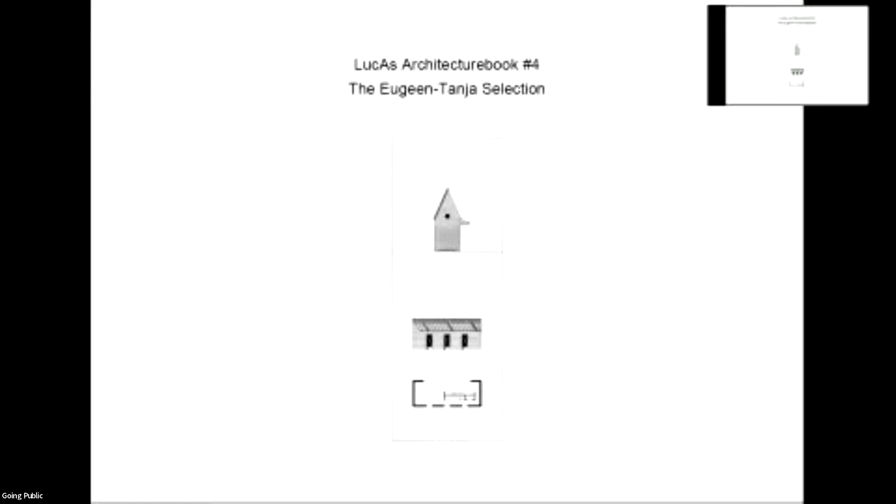So one prize for a project made by a student at school, and one project made in a studio by an architect. Every year, students submit projects by semester, and every year the number is growing. These entries are viewed by Eugeen and a committee of teachers. After long deliberation and with the necessary enthusiasm, the selection is made.

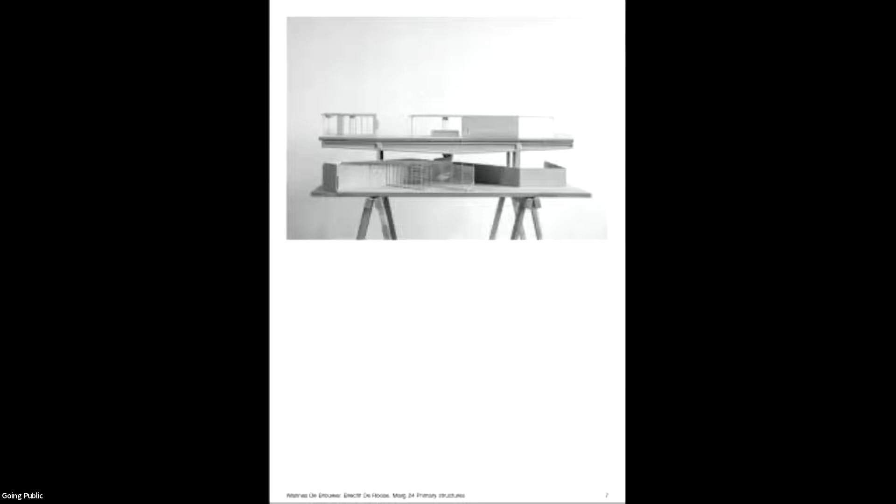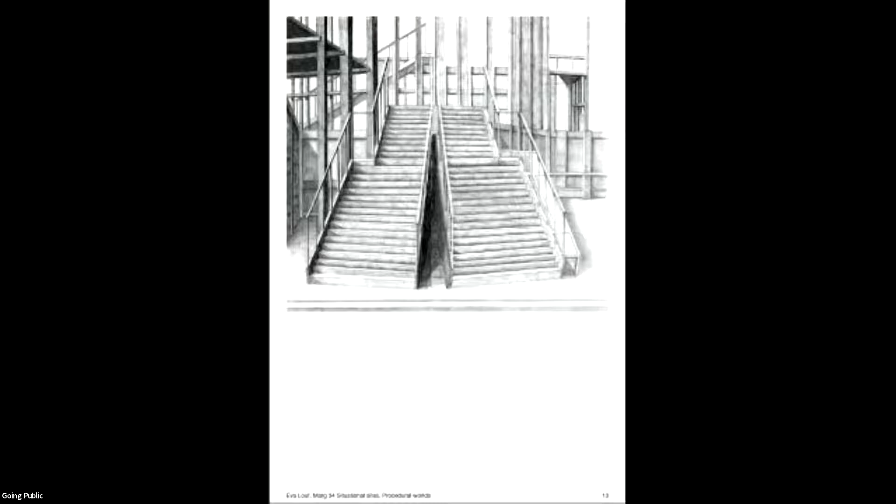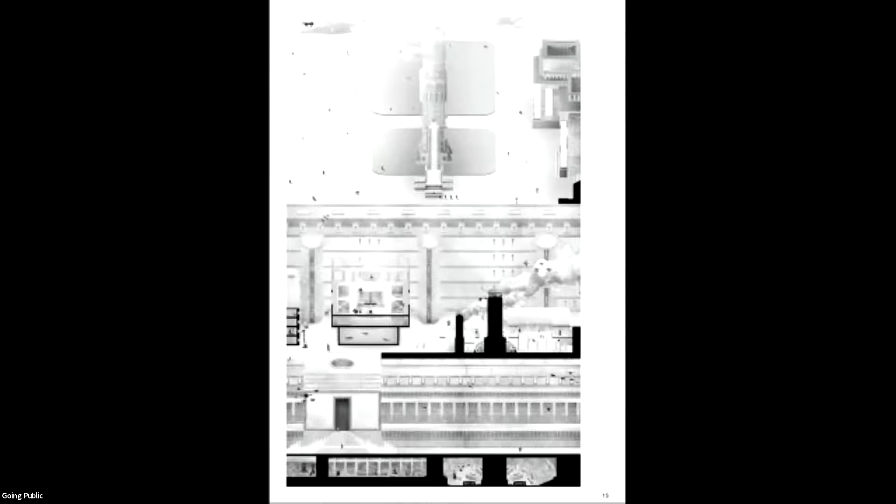Eugeen was a teacher who invited students to debate and to question, with words but also with drawings. After all, Tanja, from the title of the book, is a drawing by an architect who allows architecture to be much more than just architecture. Tanja is a drawing by Eugeen. The drawing does not show everything, it shows just enough to suspect everything. She was drawn to dream. That is also what we looked for in these submissions, the potential to dream and to imagine.

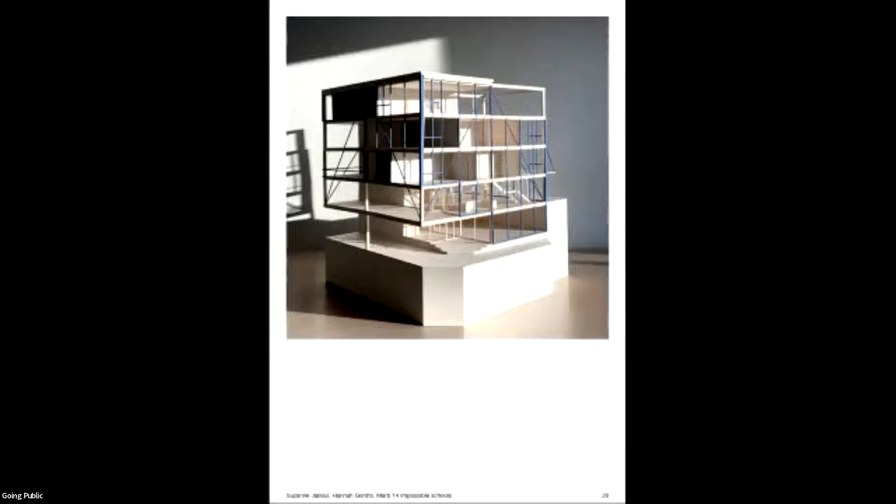Drawings and models are essential for the development and communication of architecture. They make us think, desire, dream. Students show their skills with it. Teachers can intervene, a dialogue takes place. We hope with this book to establish an overall dialogue, a dialogue that encourages debate.

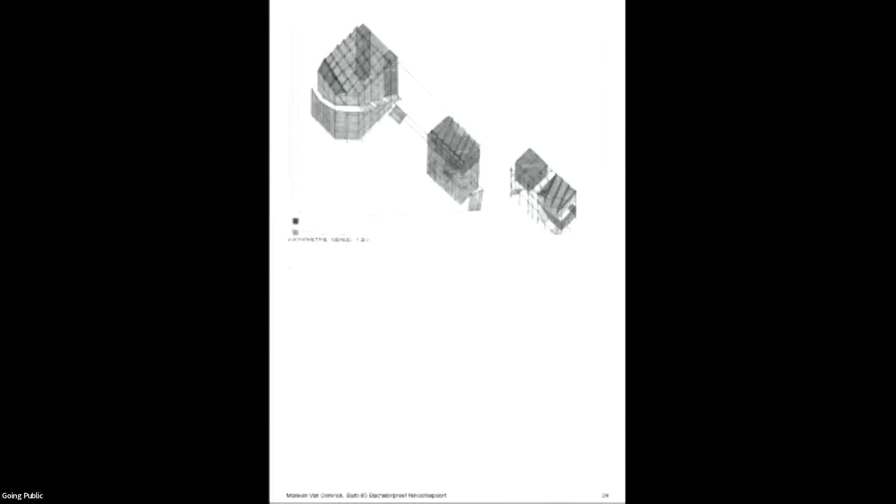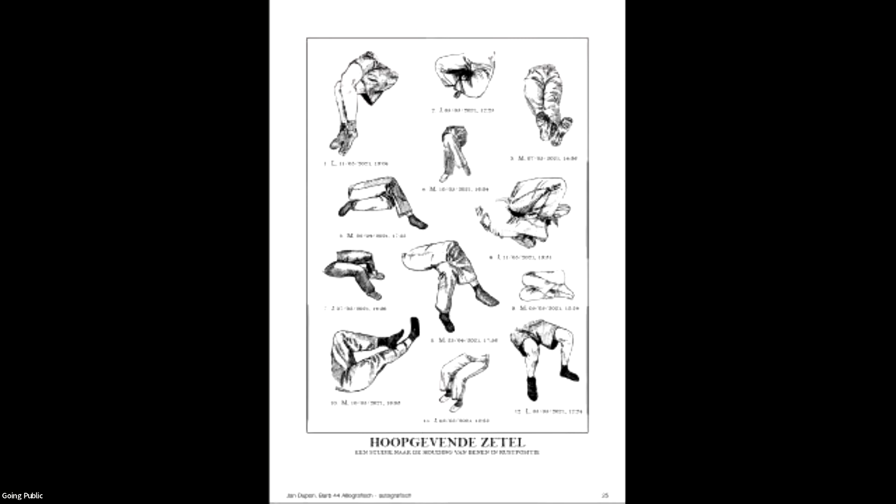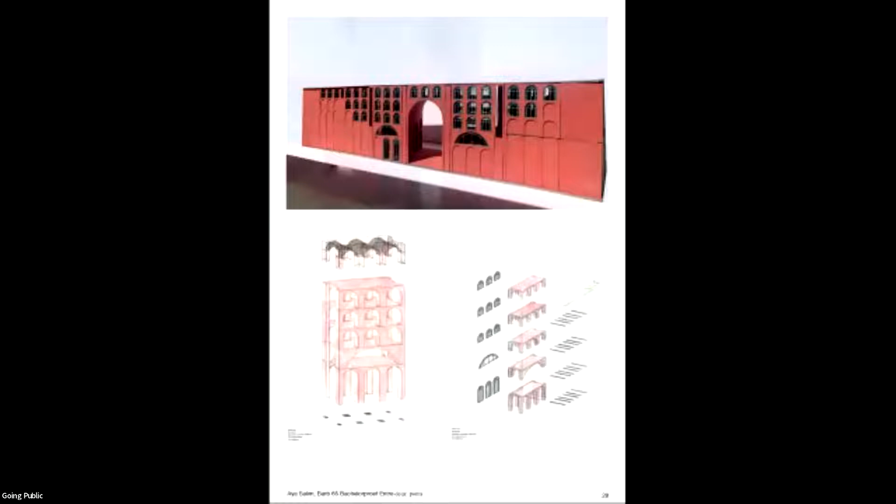Students have been submitting their projects for 4 years now. This year, the drawing, especially the process drawing, received extra attention. In this edition, you will find remarkably more drawings: process drawings, concept drawings, drawings about materialization, drawings about construction, and so on. It's surprising how diverse the entries are and how diverse the personalities.

Students visualize the world of their project in their own way. This is what makes the selection so special and what makes it unique to our school. Lucas Architecture wants to celebrate the architectural projects, and more precisely the projects of the students. The book consists of a selection of 40 student works, extracted from last year's studios at KU Leuven, Faculty of Architecture, Ghent and Brussels. But the book is also about the teaching staff.

Following the selection of the submitted student work for this year's edition, we asked the teaching staff of those students to do two things. Of course, a summer came after a long pandemic year, and some were already elsewhere and could not react. Still, a nice amount of answers came in.

First, we asked the teachers to send in some pictures of their own work in order to reveal proximities between students and teachers, and coherences across studios and architecture practices. In a word, to reveal what makes a school.

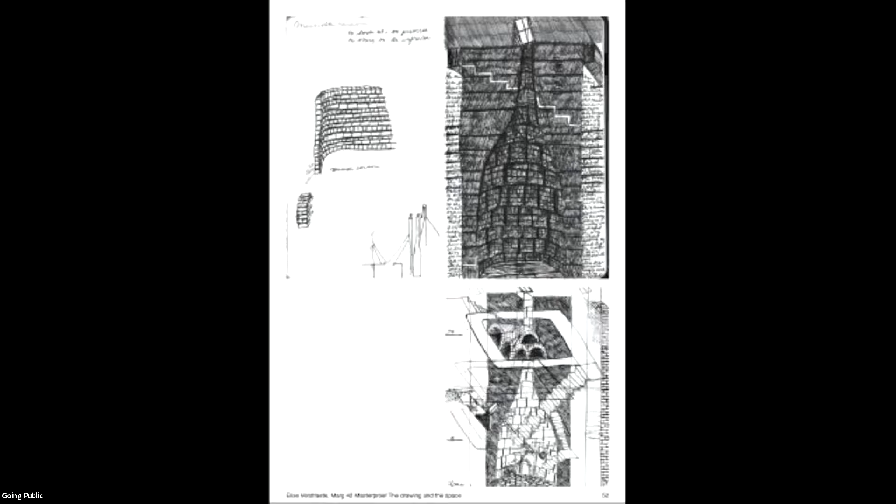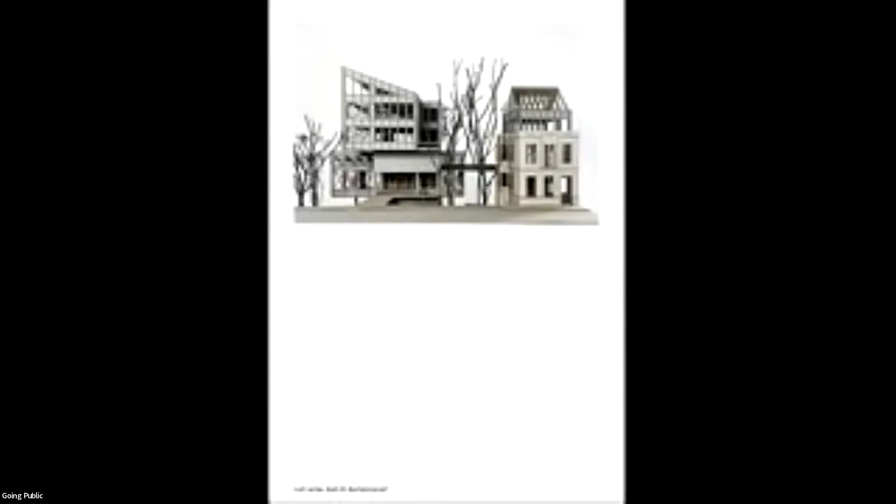Maybe here again, there is a striking diversity of inclinations, and still you can clearly feel the school behind it. Based on the submitted work, we ask one lecturer to present on the book presentation. So this evening, we introduce you to, as they are part of Wissel Architecture Studio, Lennart Vandewaetere and Marius Vaneeckhoutte.

Teaching in first and second year, their work has not escaped our notice. Wissel consists of 3 members, the third is Felix Hietekatte. Their project, the Tower of Seoul, is currently on display on the ground floor of the campus in Brussels. I would definitely check it out.

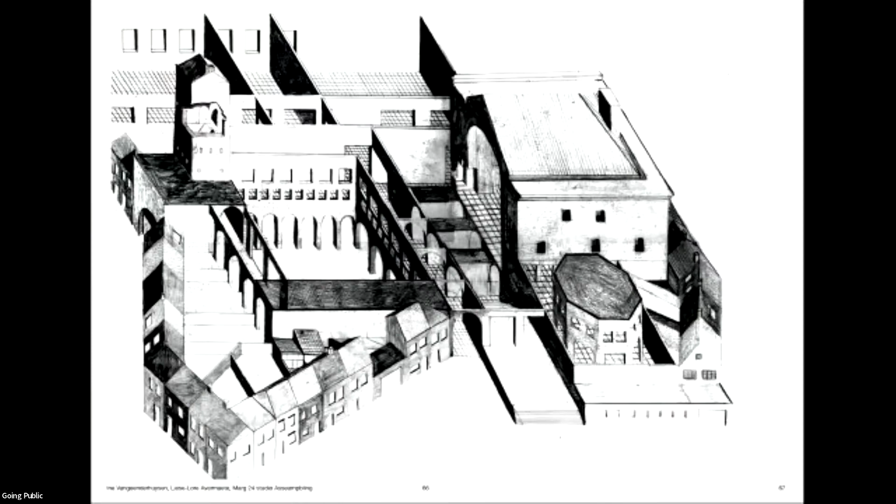Wissel is an architecture studio based in Brussels. Wissel tries, dares, acts and interacts. Wissel shifts between drawing, model and image. Wissel researches anatomically. Wissel ignores the obvious in search for the unexpected. Wissel is a change of course in a thinking process. Wissel is a cross-fertilization between thinking and acting. Wissel is searching for function transcending spatiality. Wissel is an act of changing to or adapting one thing to another. Wissel changes the position, direction, or focus at any time. Wissel is a verb. I give the word to Lennart and Marius.

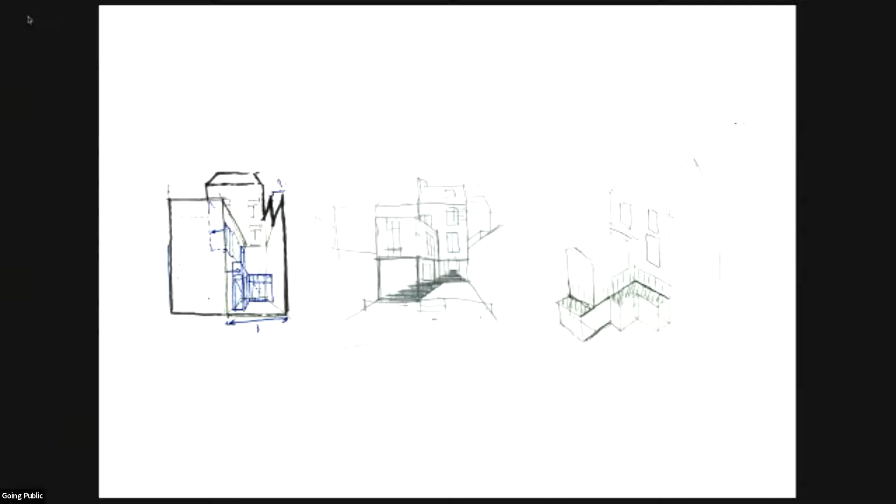These are organization options we tried out in the beginning of the pre-design. This basically tells us that it always comes down to a good position of the toilet. As weird as it sounds, it's really a very important part of the plan, where to put the toilet. It's actually kind of the last piece we needed to fit the puzzle of the ground floor.

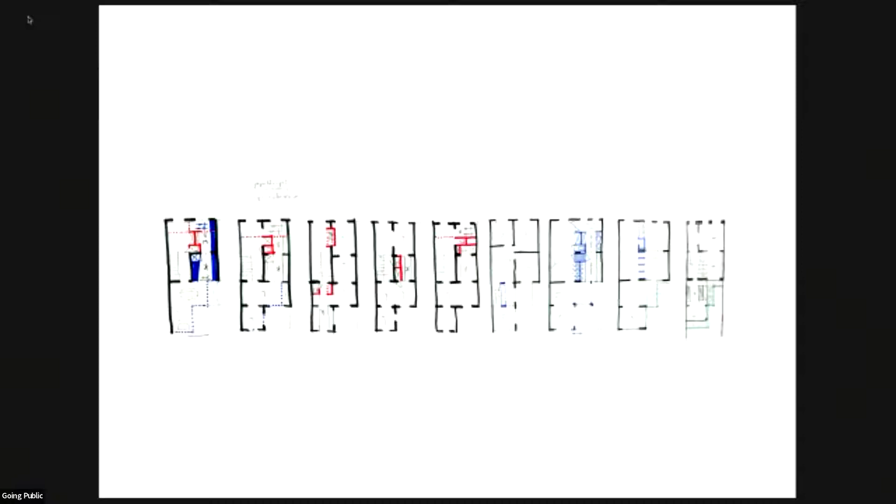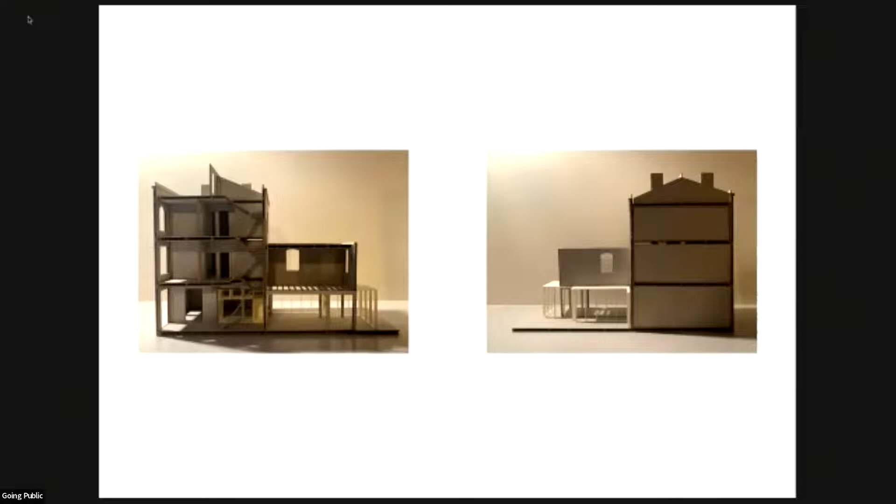This is one of the first sketches we made, because another really important thing about the house is that the garden is oriented to the north. So we have a lot of possibilities to drag light into the house, and we don't have to be scared of overheating or too much glass. This is the first hint of what we were going to do with the facade afterwards.

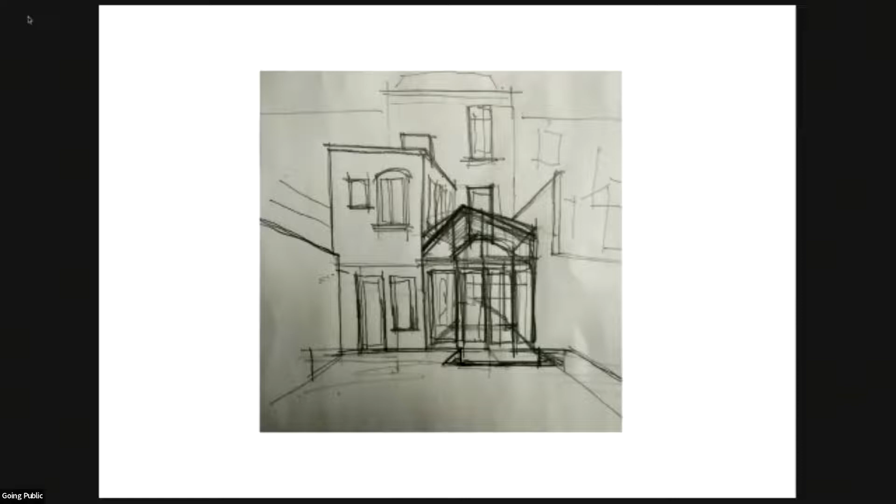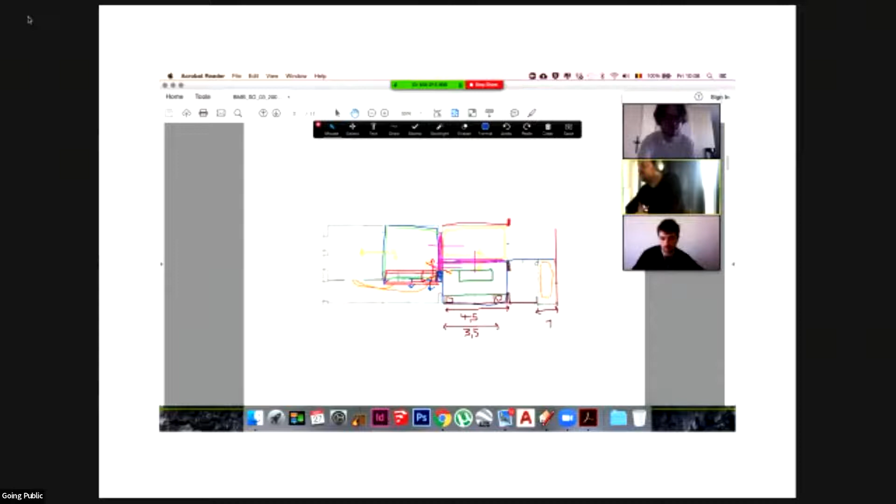This is a print screen of a Zoom conversation we had in March, around the beginning of the lockdown, where we tried to get a grip on the pre-design, all three of us in our own houses. Soon after this conversation, we got to the first big part of the pre-design.

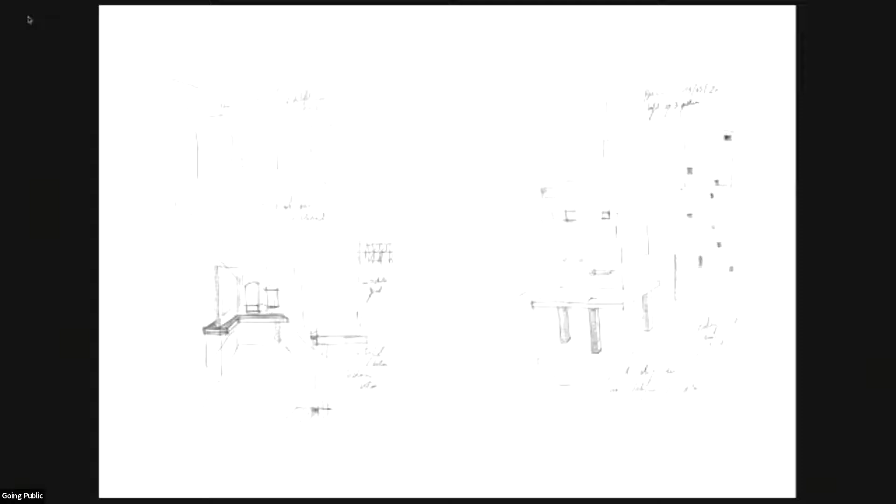One of the main questions of the project was how we could preserve the existing ensemble on top of the ground floor, which we wanted to give some new functions. This is probably one of the most important sketches from the pre-design, because it became our main concept. Instead of just holding up the upper part with a normal concrete beam, we thought to stretch out those classic standard lintels and make a kind of table from it. The idea grew into making a concrete table that functioned as a stretched lintel.

The nice thing about this idea was that it held up the existing situation, but also created a kind of free plan underneath. So we were really free to place all the structural points where we wanted, and to create a free canvas for the facade structure.

This is the first implementation of this concrete table in our plan. On the left side you see all those red marker points — this is really the first tryout to position the concrete columns. Here you can also immediately see the quality of this idea of the table, because it's enlarging the fourth room, which becomes a garden room, let's say.

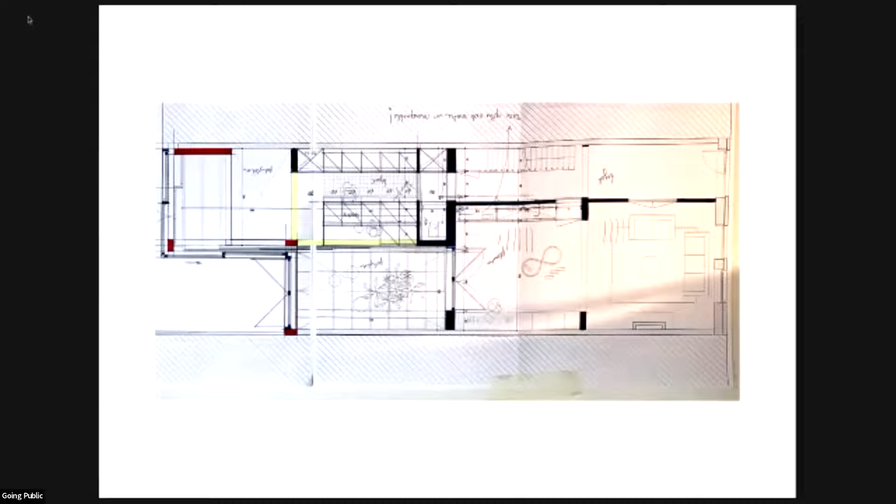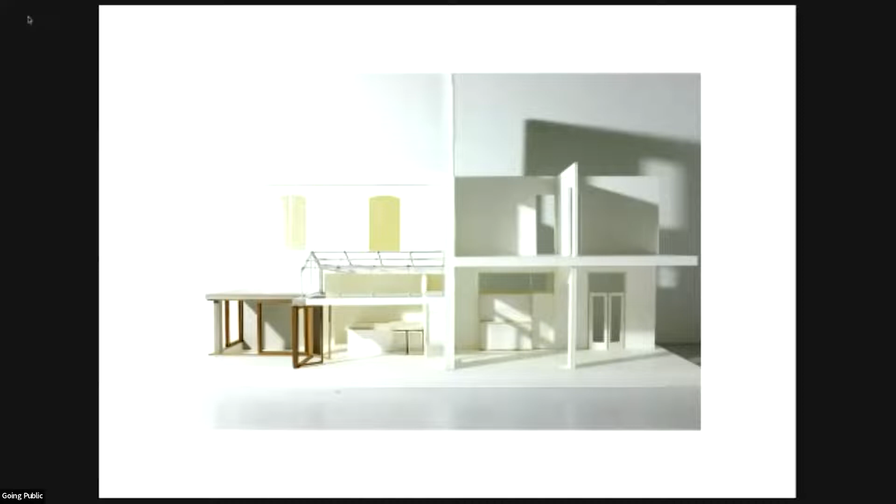This drawing was actually a standstill before we were going to draw all the plans to hand in the documents for the permit we needed from the city of Antwerp to do this reconversion. It's also important because here we decided what rooms we were going to put in sequence. On the right, you can see the existing house, where we kept the situation as much as possible how it was.

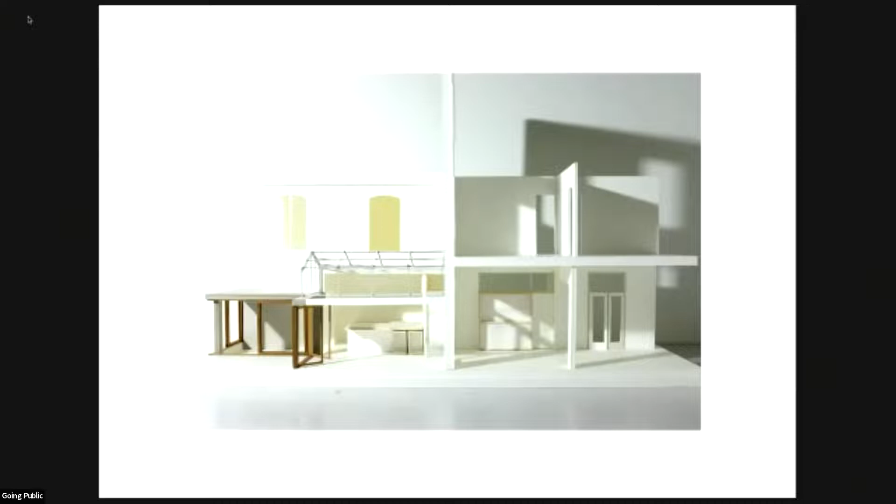The two rooms on the left are the new sequence, where we put the kitchen, but also two different rooms positioned at the back toward the garden, and a room underneath the glass dome you can see on top. The sequence of these four rooms, going from the facade to the garden, is a kind of walkthrough or spatial experience we wanted to try.

The first thing we noticed was— something's happening to the presentation. Just a second. Okay, never mind.

One of the first things we noticed while testing the idea of the concrete table in a model was that the level of the concrete table allowed us to put a big glass dome on top of it, to get all the light into the existing parts of the house. Because it's oriented to the north, we were free to do that, and this is the first model we made where we could experience the light coming through to the facade in front.

These are drawings we made to discover how to position the columns of the concrete table. This is also research for the back facade and the level of the concrete slab, the dome on top. It's something we do at Wissel a lot — we make models and then we sketch again, make new models, sketch again. I make a sketch, give it to Leonard, he gives it to Felix, and that way we go on.

This is a new version of the concrete table. This is a classic Wissel moment where we go too far and design too complex a structure — we wanted sliding windows, but it was a bit too much at this point. Because it was lockdown, we had a lot of time for this design, so we made a lot of options in this space. This is a typical moment where we try to implement too much into the design.

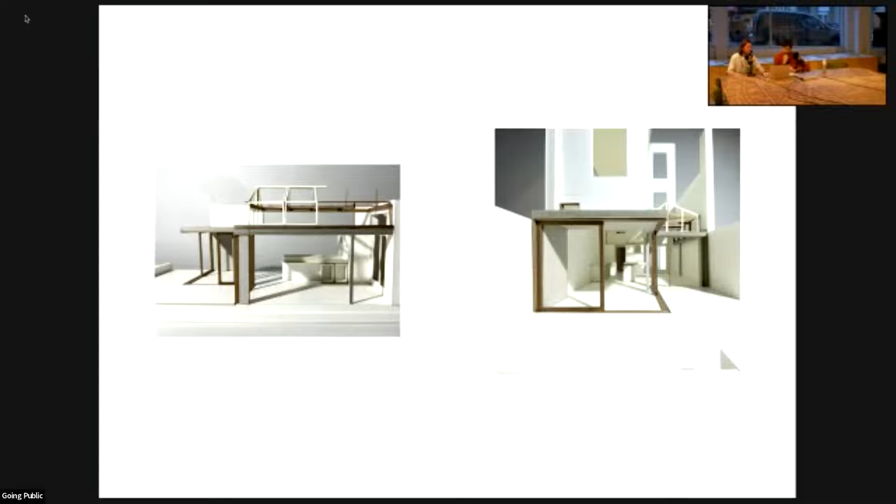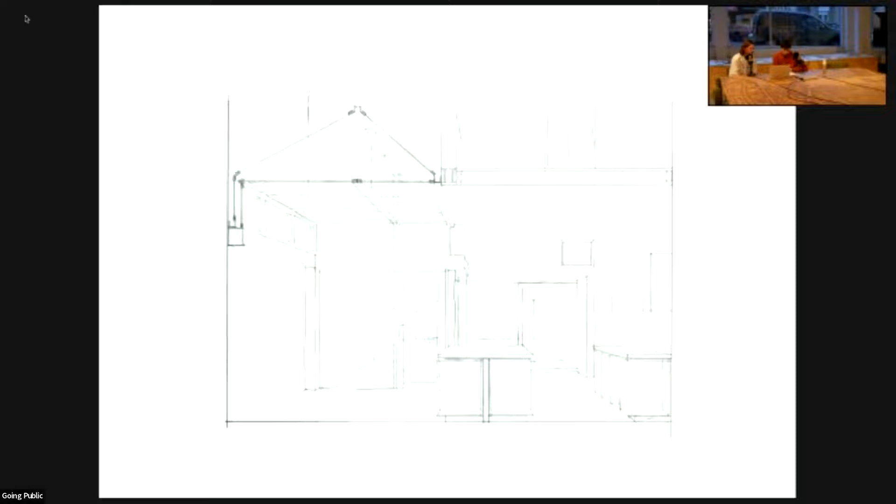This is a drawing — basically a technical section, but also a perspective of how we wanted to experience the garden from inside the new rooms. So this is basically the end of the pre-design, where we discovered a lot of joints and construction moments which we hadn't worked out yet.

So then we started with the tendering phase. As Marius said, the ideas were quite wild. The design was full of nice ideas, but all those ideas need to be constructed as well. So we started the tendering phase with the new existing situation, the new facade structure, let's say.

Something we always do with Wissel is using a lot of references. So the reference is an important thing in our process, but mostly we don't show the reference only as a reference. We always try to show it as a two-sided image, and we always try to give an immediate interpretation of it next to it.

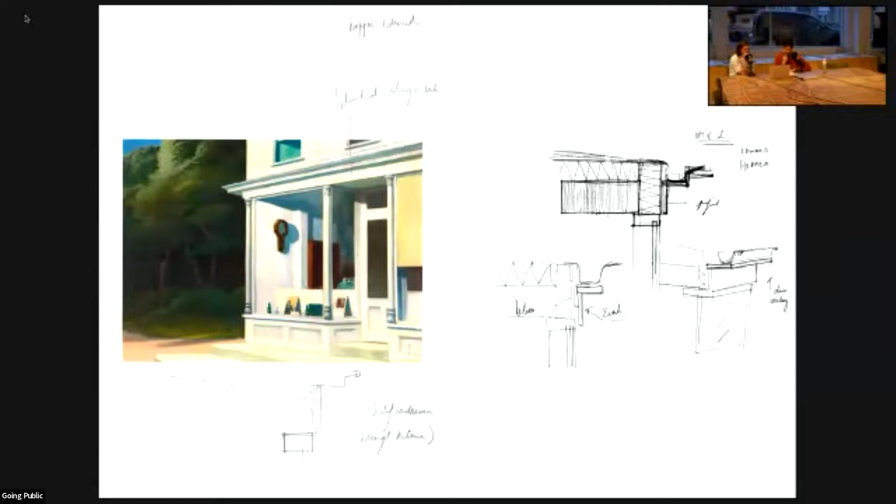This is really an example of it, coming straight out of the process bundle. On the left side you see a painting of Edward Hopper, quite famous for his colors, light, shadow, but also well known because of his architectural details. In this reference, we find an interesting roof edge. On the right side, you see our interpretation on sketch. First, above the sketch, we try to figure out how this roof edge is working exactly, but immediately under it we start to reinterpret this idea of the roof edge, the gutter edge from Hopper, and it becomes quite fast our own interpretation.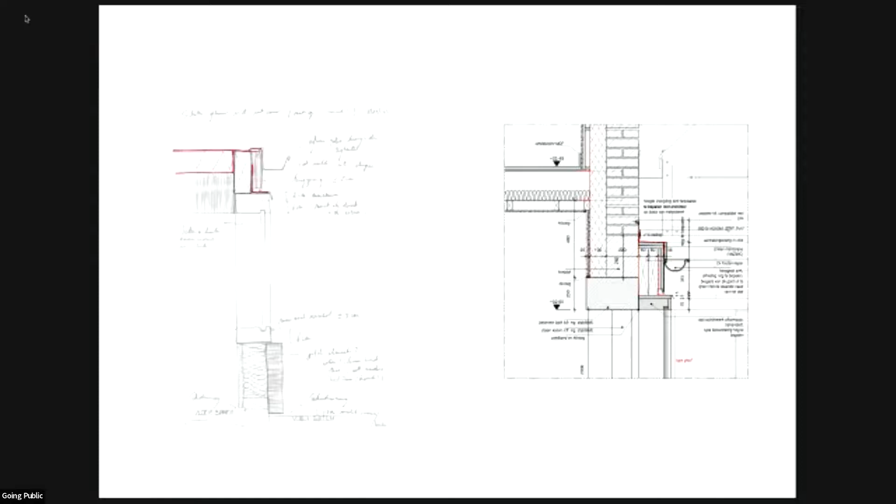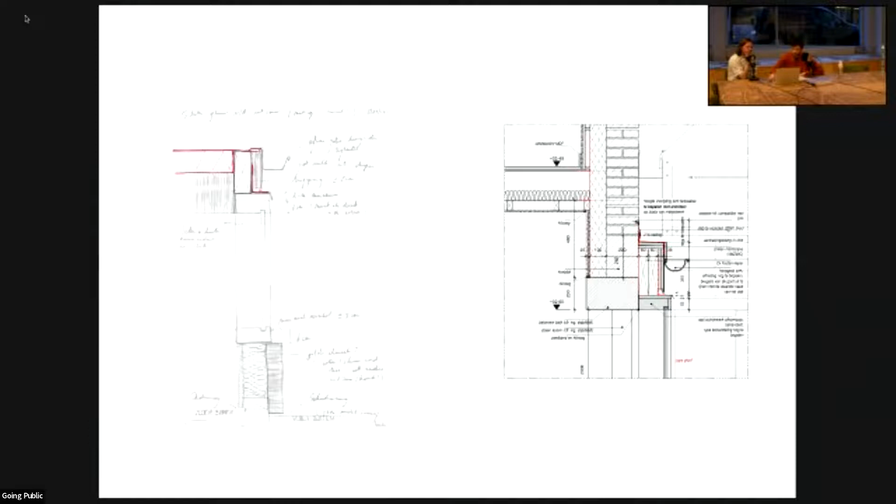Here on the left side you see one of our final sketches of the roof edge, and the idea was to start sketching for making. So actually we have a concrete table, on top of it there is a part of isolation, a very thick package, and to make that package smaller from the outside, we pushed the facade carpentry above and brought it in line with the concrete table. So the bottom of the structure, of the windows, and the bottom of the concrete table are in line with each other. Then the gutter, we placed it in the center of the zinc slab on top of that, which makes the roof edge much more elegant, and those gutters start to become a very dominant thing in our design.

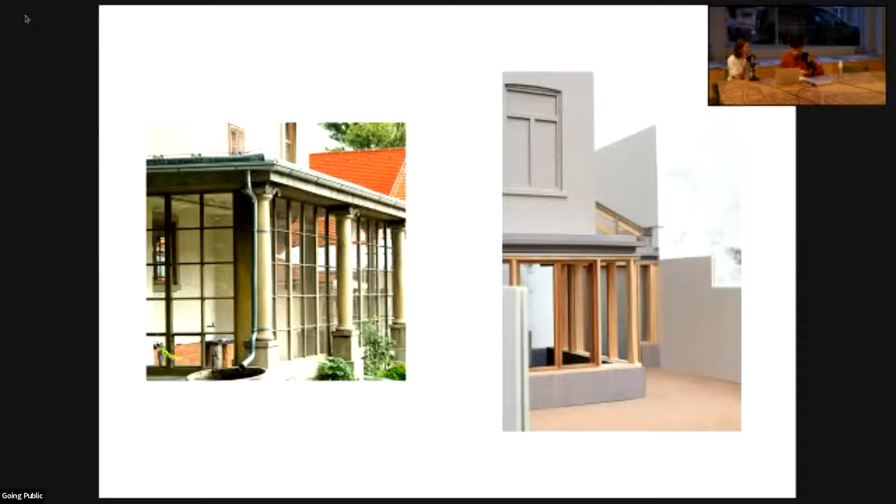On the left side, again, a reference. It's a very classic reference from Josef Plečnik. What we really like about this image is the whole gutter concept, which is more centered on the roof edge. On the right side you see the first image of our tendering model. Those two images next to each other really explain what we want to do with this roof edge. So these references are not only about atmosphere and materials, but they can also present a kind of detail. We think that the classic interpretation of the reference from Plečnik is really communicating with our existing ensemble on top of it.

The next step was to figure out the facade structure. We did already a lot of research in the pre-design, which Marius was explaining. But in the tendering phase, we need to make that possible, we need to make that constructible.

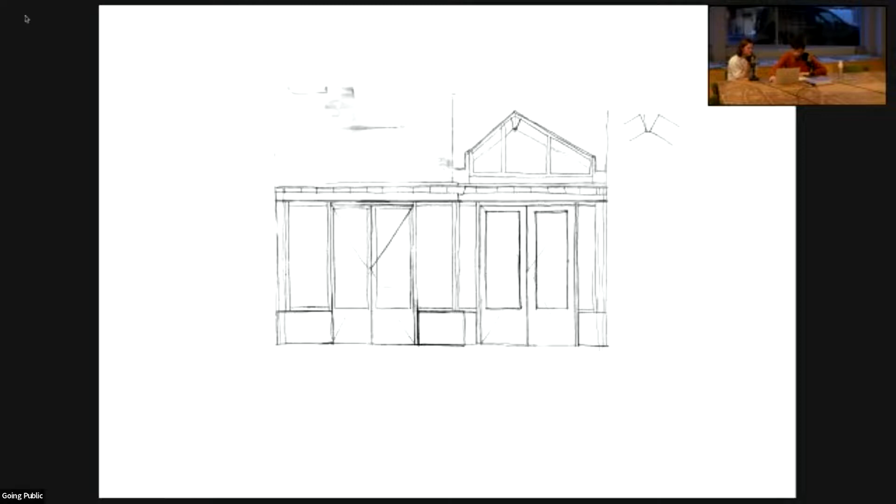We were searching for the right composition of windows, the framing, and also thinking about where do we add doors, where do we add just window frames. In this sketch, you see we were thinking about using two doors: one connecting the third room under the light dome, and the other on the left side making a connection with the fourth room, which we can call the garden room. But after a lot of discussions with the clients, they wanted a more inner space, so we came out with this final technical drawing and chose to use only windows and no doors in the garden room, to make the garden room much more of an inner space.

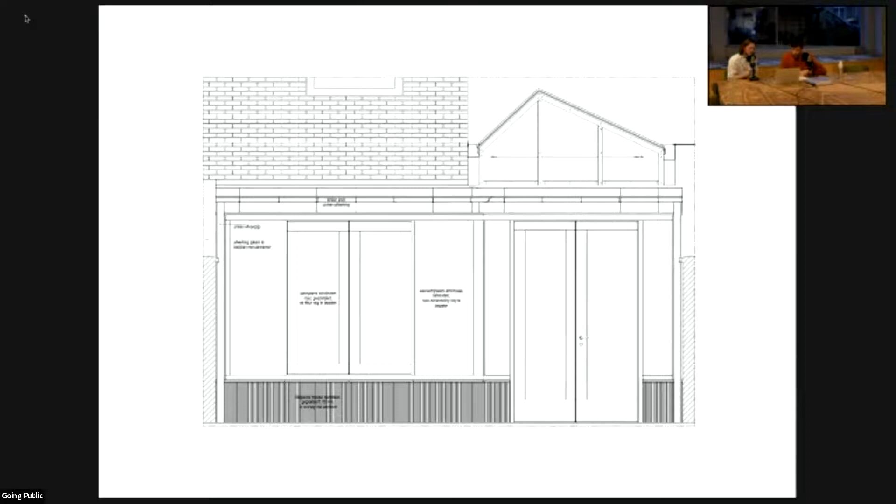In this technical drawing, some things are coming together: the whole gutter concept, the window structure, but also the plinth. We were thinking to work with a bluestone plinth, as you can see in this model, to make the project more mature and again make a relation with the existing house.

For us, the tendering model is a really important tool. It's something we use constantly to test things, to take out all the blind spots, let's say. The model is never lying. It's always a very honest document where you can test things and see how materials are combined together, how the compositions are working, and how the inner space is working.

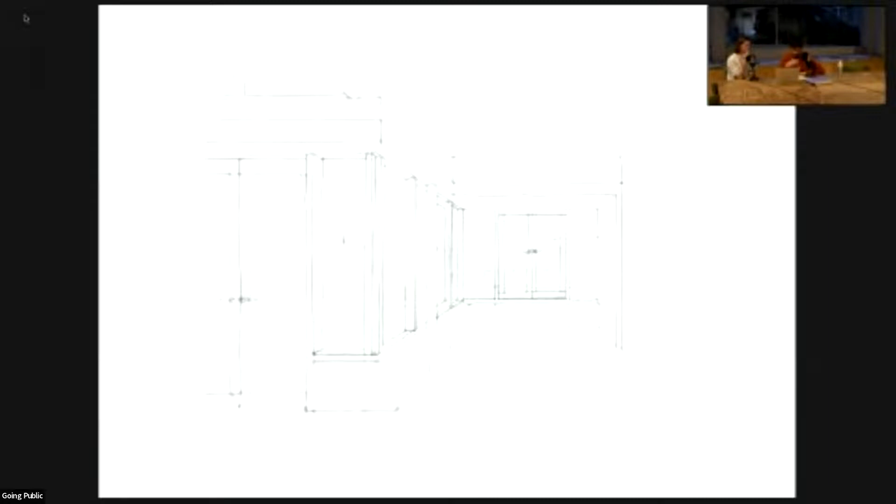This is a sketch from the inner part. We were also searching for the reversion of the bluestone plinth from the outside, and it became a kind of concrete wall, or we started thinking about the concrete wall. This concrete wall was a nice element because it was somehow also part of the concrete table concept from the early phase, and it could also function as a kind of bench.

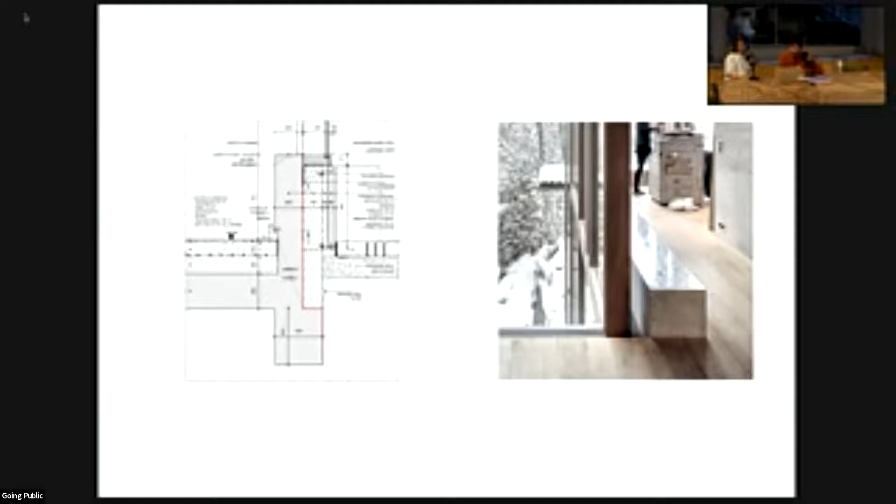We needed to make the detail from it. On the left side you see our detailed drawing, and on the right side a reference from Peter Zumthor, from his atelier in Chur, Switzerland. What we really like about this image is the concrete bench, which is combined with the window facade structure. But these benches aren't only aesthetic or functional, they're also a reverse beam, and that's the same in our project.

So the concrete wall is really part of the foundation, and it starts to be a huge part of the structural impact of the whole table and the whole foundation concept.

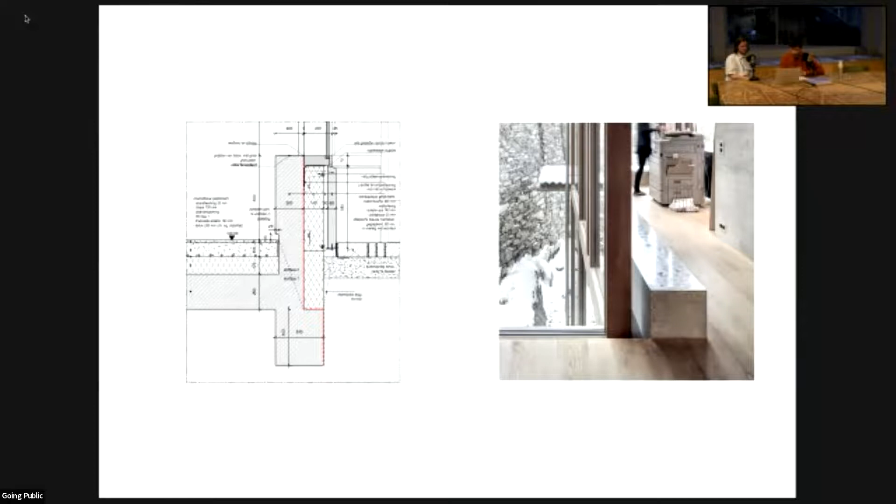Another important thing to discover was the whole idea of the light well. On the left side we see a winter garden reference from Laeken in Mechelen. It's a very ancient project, but we really like the structural concept. It all starts with the window framing, and on top of this window framing you see steel L profiles making the bridge to the trusses of the light dome. Those L profiles were actually a good answer in our project to make some space for the gutters.

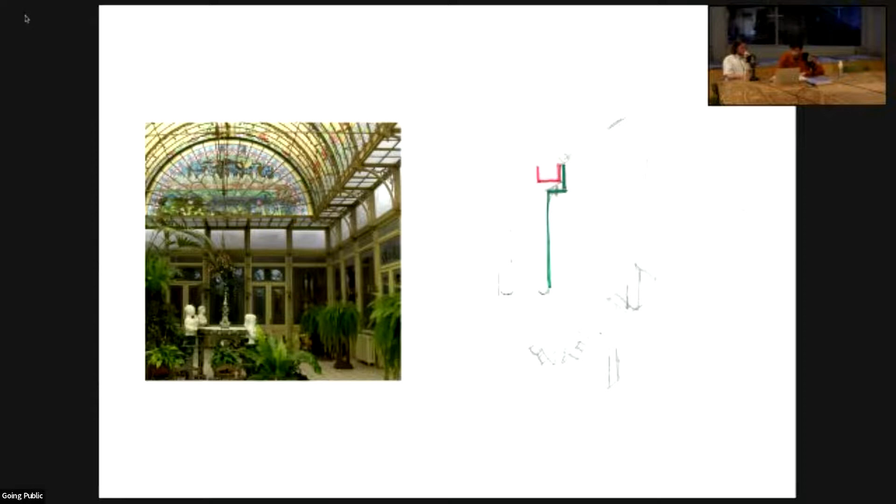On the right side you see some sketches, the first basic sketches we made to come to this important section in our project, explaining how our light dome, our light well, is working.

On the right side you see at the bottom the concrete table where the L profile is put on, and on the left side those L profiles are hanging on the existing building, making place for the gutters, and on top of it are the trusses creating this light.

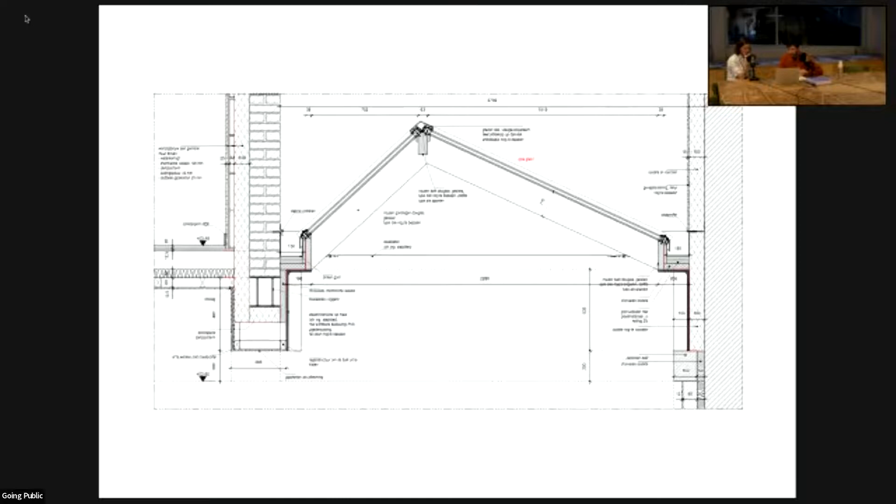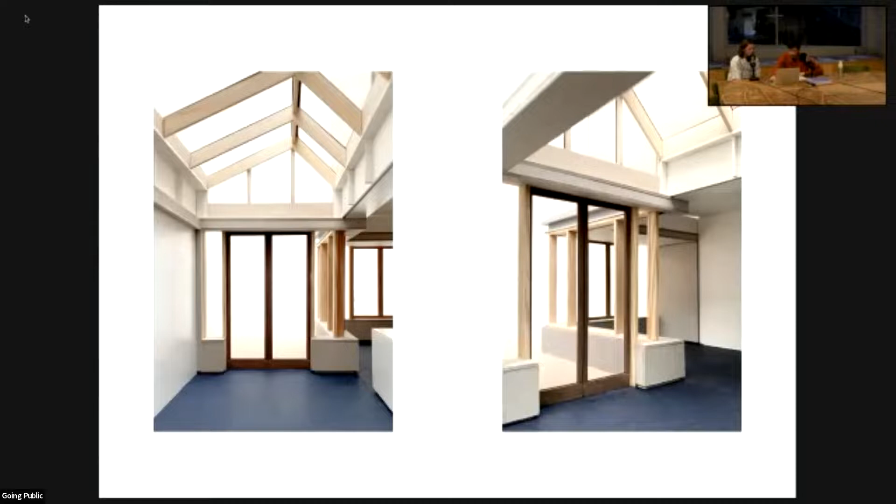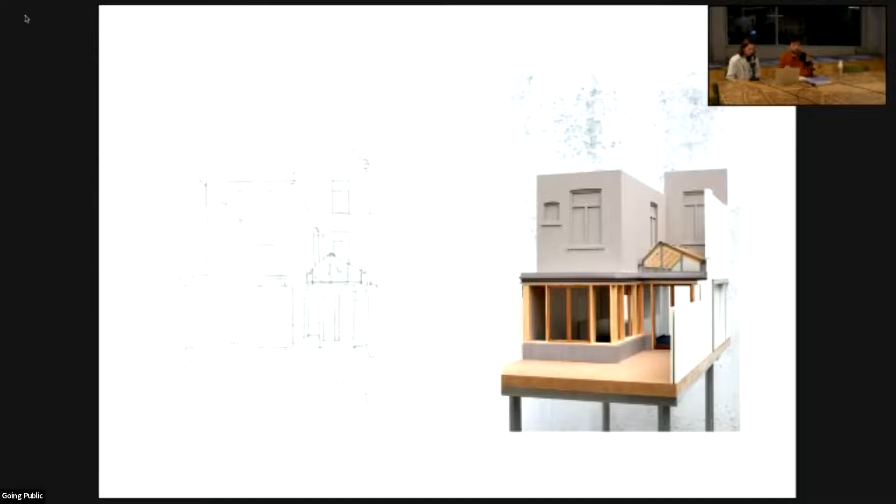These are, let's say, the final documents from the tendering phase, and now it's time for construction. We started this construction with these images in our mind. We were really convinced ourselves as designers with these models, but also our client. So this was kind of the bar that we rose to before we went into construction.

The first important thing to do was actually build a temporary structure to maintain the brick volume on top, and to make room for our contractor to realize the concrete table, which was the biggest action in our design, but also the first thing to start construction with.

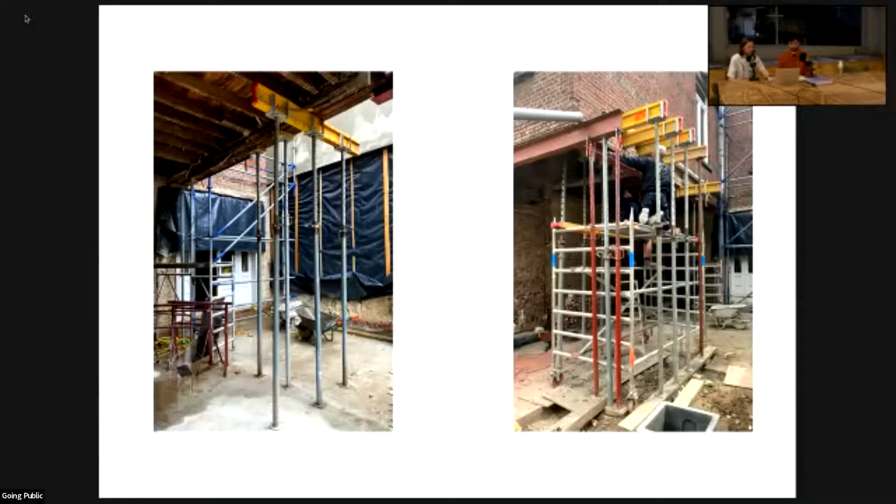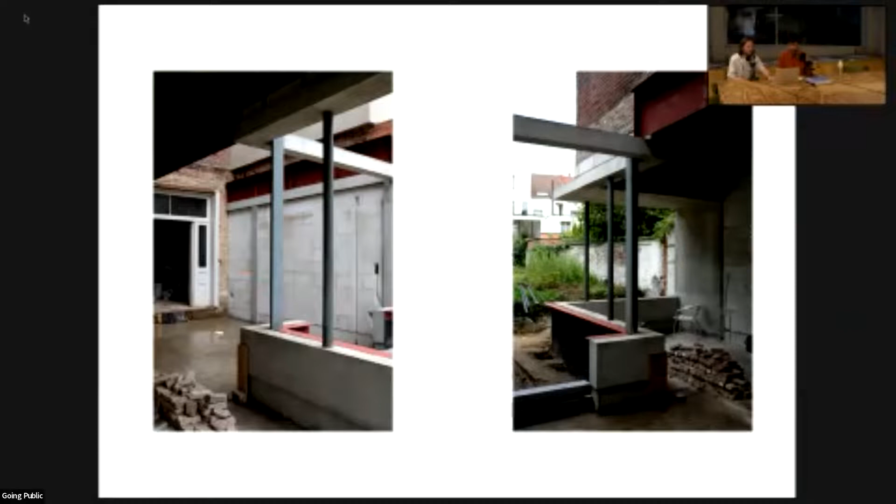Here we can see the concrete table when it was constructed, together with the precise choice of where to put steel columns. You can also see the concrete bench. It was really important to realize that this was actually the final structure, going to be visible in the interior, so this was the finishing of the table as well. We realized the importance of it.

When you construct something, it's never 100% the measurements you thought about. It has a lot of small mistakes, small alignments you didn't expect. So we made this drawing during construction to communicate with the carpenter who came after the concrete table. He had to make the wooden facade structure, which was going to go on the table, but also the wooden light well, the light dome that came on top of it.

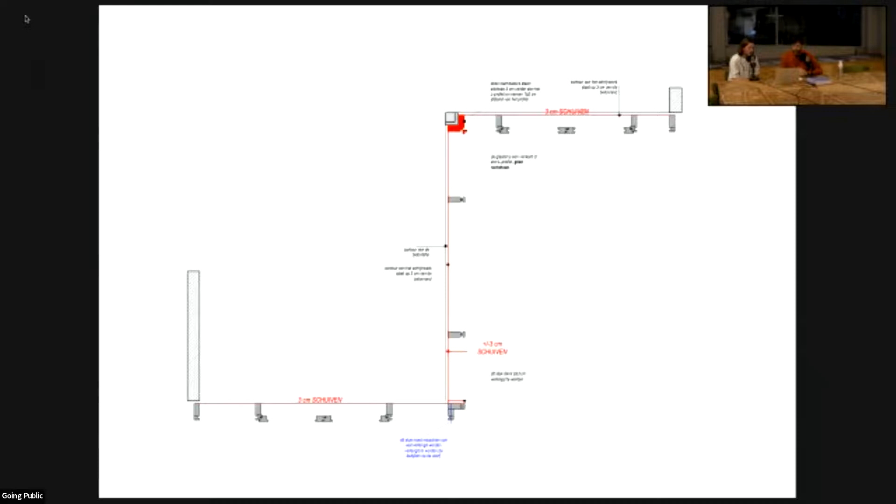After that, we're still in construction phase, no interior whatsoever, but at this point our main concept was actually realized. We had our dome, we had our table, and we had our facade system, which opened up the whole house to the garden.

During construction, we often looked back to the model pictures to see if everything's going according to plan, if everything is going how we hoped it would. We also used these pictures to communicate with our contractors, to explain some really precise joints and knots that we thought about. This was also a big struggle during construction.

This was not an easy construction site, but at some points during construction we were happy with the result, especially when we looked to the light well—it's basically the same as our model. That's actually the goal we had with this model, and this was a small victory for us during a very difficult construction phase.

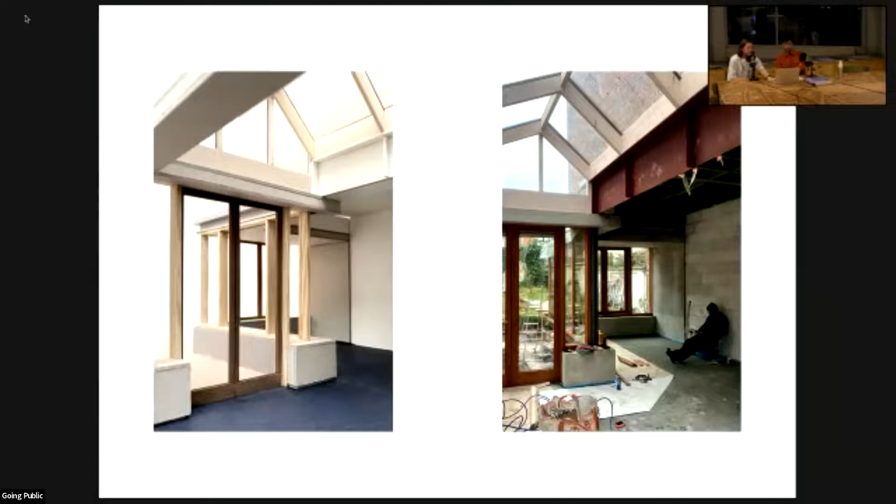This speaks a bit for itself. Really, it's the view from the existing house to the garden, and then the view from the garden to the new facade, where you can see that now the concrete table has been covered by carpentry with the door, but also the wood that we needed to construct the light well, which is basically how it is at this moment in construction.

Now we're waiting for the contractor to finish the roof. The table is going to be covered with the zinc roof, which is actually going to be built next week, but we had a small delay because of the stormy weather we had last week.

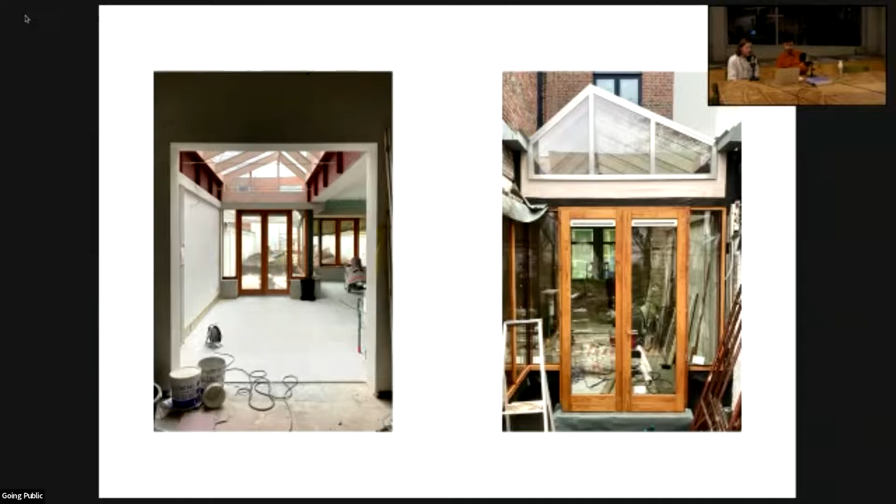And this is the final view. It shows the realization of the drawing we made earlier, how the carpentry and the facade would fit with the concrete table. And now we are preparing the construction site for the interior.

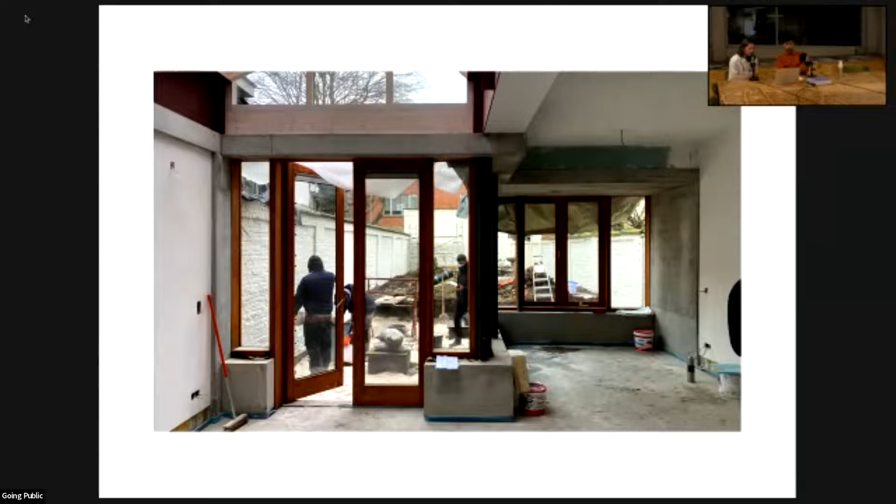And this is a fragment where you can see the existing facade on the left side of the picture, how the concrete table is still going to be visible when the interior is finished. And we also see the structure, how it's aligned with the table, which eventually supports the light well.

Together with Frédéric Tonio, we chose precise points where to put steel cables, because the light dome is quite heavy and it pushes to the side. So we put two visible steel cables to maintain stability.

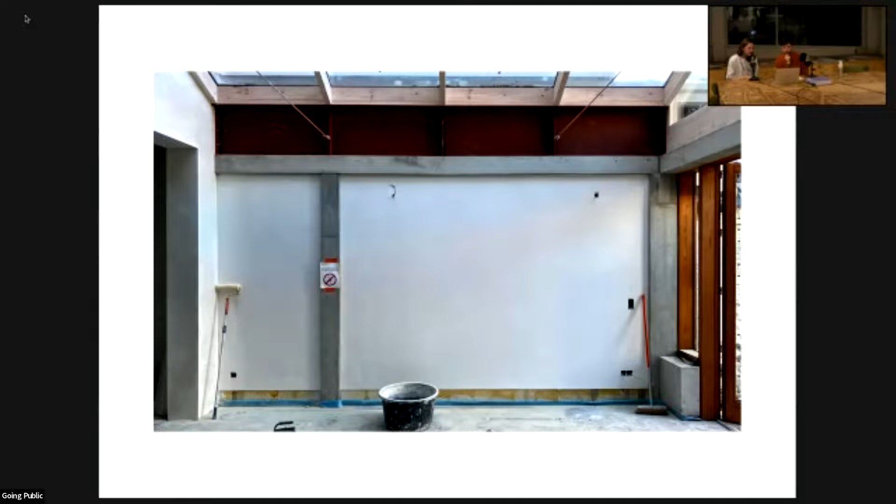We made already all drawings, and the carpenter is actually now working on it. And this whole interior project is something in process now.

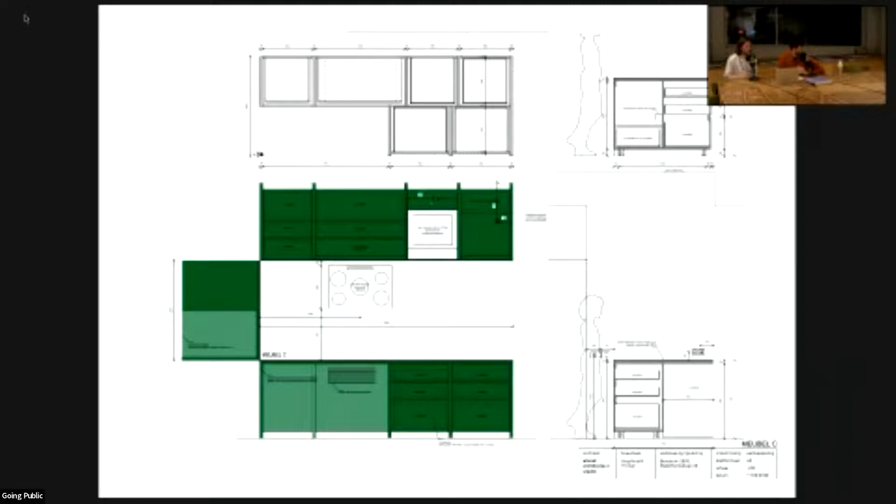What we did was just seeing this as a kind of plan. Sol LeWitt graduated as a graphic designer, but after that he started working for a while as an architect in an architecture office. And somehow every time we see pieces of art from Sol LeWitt, we see somehow architecture in it.

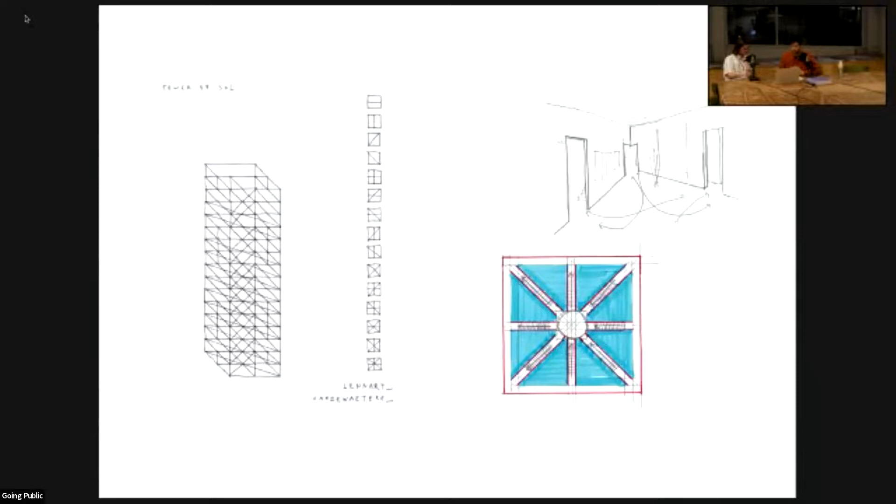So we start to duplicate all the walls to put staircases in it. And all those staircases are creating circulation, and figuring out this whole circulation concept was actually the main thing of making those towers

accessible. On the left side, you see again the art piece of Sol LeWitt. On the right side, you see our interpretation with the duplicated walls, the staircases in it, and how higher you go, how fewer possibilities of circulation there are.

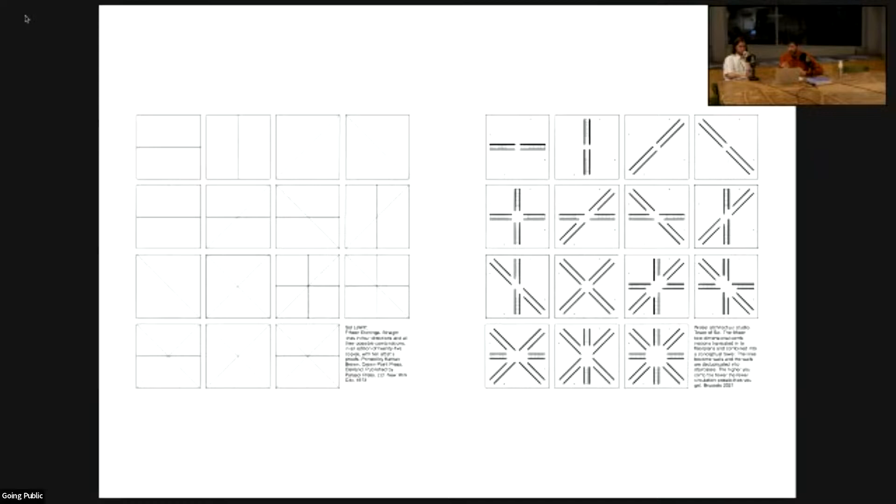So somehow it's also communicating with the reality: on the ground floor it's full of people, and the higher you go, the more place there is for you as a person. So the less circulation you have, and also the bigger the spaces become.

Beginning of 2020, there was an entry for projects during the design week in Milan. We sent in the idea, this drawing, because at that point the idea of the Tower of Sol was only in our minds. It was an idea Lennart had about 5 or 6 years ago, when we were still living together just after we graduated.

We got selected to show the model at the venue in Milan, which was fake, authentic, iconic. Then the concept changed, it was not an idea anymore, it was something we wanted to build into a model. From that point we stopped thinking abstractly about it and tried to find a way to make this into an actual model.

Then we looked back to Sol LeWitt, because he also made a lot of abstract models, which are not architecture, but one could find inspiration for it in architecture. The way they were always in white, super abstract, no real materials, really fitted our idea, so we took a bit of that atmosphere into how we were going to make our model.